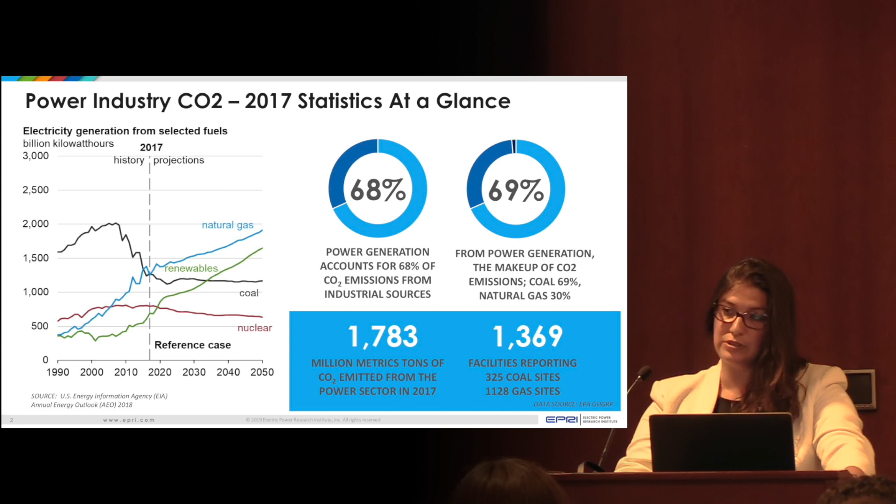In the past 10 years or so, right? So in 2017, about 30% of our power generation came from coal. About 30% or so also came from gas. 20% or so from renewables, actually closer to 18% renewables. Most of that is hydro. The remainder of that, maybe 6% wind, 1.5% solar or so. And then a solid 20% in nuclear power.

So if you look at CO2 emissions that come from the industrial sector alone, 68% of those emissions come from the power industry, right? Which is why we kind of have our whole thing just talking about power generation today. So for all industrial CO2, 68% come from power. Of that 68% that come from power, 69% of that come from coal, and the remainder comes from gas with other things here and there, right?

So if you look at the amount of CO2 emitted in 2017 from coal and gas plants, 1,783 million metric tons of CO2. That's a lot. That's a lot of zeros, right? Which came from about 1,300, 1,400 sites. 325 of those sites, which put out 69% of that, were coal, and about 1,200 or so of those sites were gas sites, right? So you can get a feel for how much more CO2 comes out of a coal asset than out of a gas asset, which is probably not a huge shock to anybody here today, right?

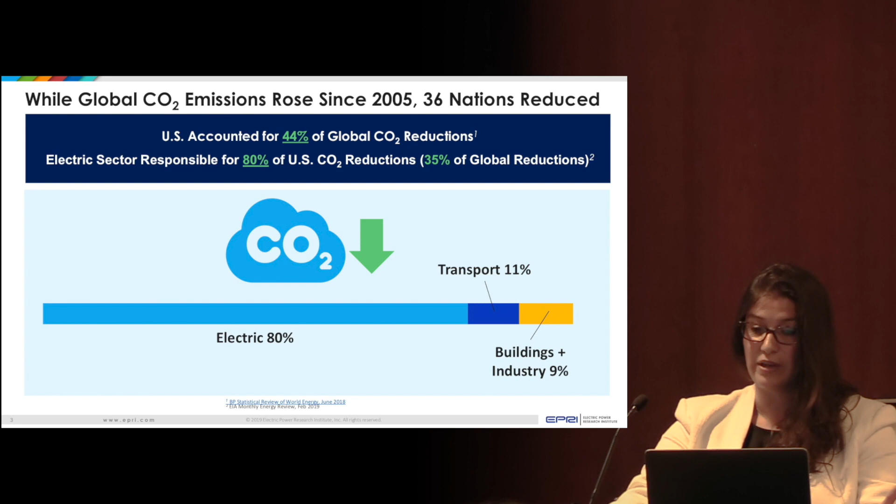So when you look at that, we can't just assume that we're not doing a good job, because actually we're doing quite an amazing job. If you look at CO2 emissions since 2005, although they have gone up, 36 different nations reduced their CO2 emissions, and the U.S. accounts for 44% of those net reductions. And 80% of those net reductions came from the electric power industry, right? So the net reductions that happened in CO2 since 2005, 35% of them were due to the electric power industry, and you can see the breakdown there for the other impacts. So we've had a lot of successes, and we've done a lot of great things.

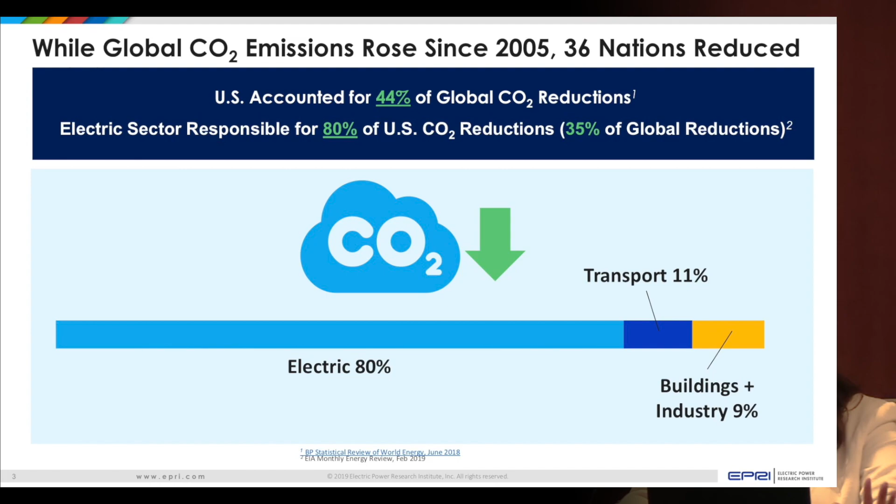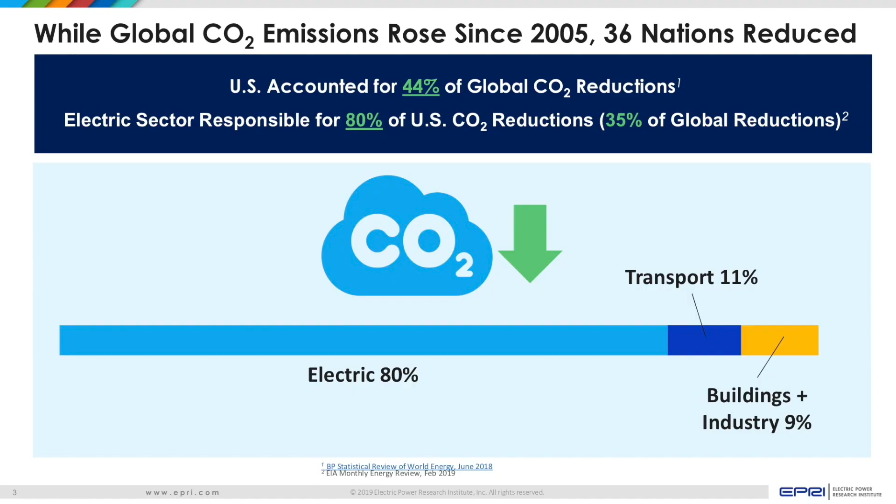Now, what's led to this? A lot of things have led to this. Primarily, those CO2 reductions from 2005 were due to two things. One was efficiencies, and the other was fuel switch. Right? We've had a significant fuel switch since 2005 that's led to that. So let's start with a little recognition. Let's go back 20 years.

Okay, this graph, it's an engineering graph, I'm sorry, but it's not that hard to look at if you think about it. So you have the blue line. The blue line is SO2 emitted in millions of tons. The green bars are CO2 emitted in billions of tons. So it looks like SO2 is bigger there. It's not. I just don't have a scale big enough to put it all in one graph, right? CO2 is significantly larger than SO2 there. But look what SO2 has done over the past 20 years.

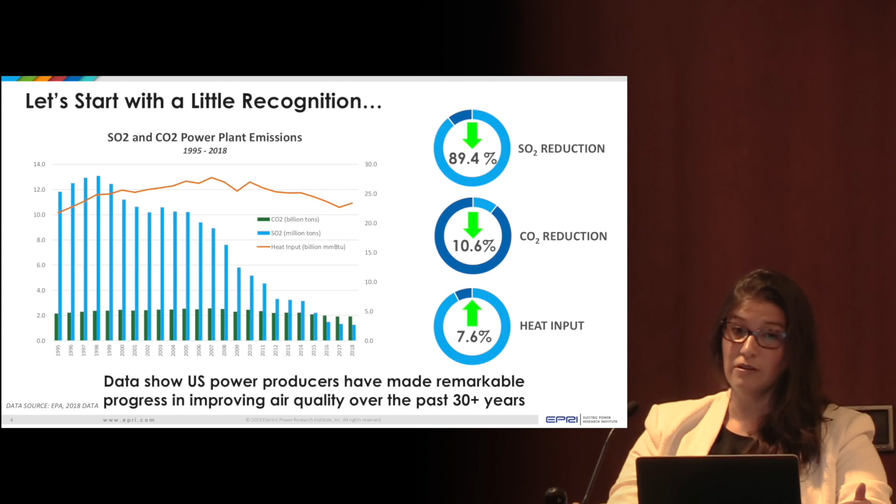What has made that happen? It's not just fuel switching, FYI. It's technology, right? It's the technology that this industry has adopted that has made a remarkable change in some of the emissions that we have put out into the atmosphere, right? So SO2 reductions in the past few years have been 89.4%. CO2 reductions about 10%. Again, most of that is due to fuel switching, and that's with an overall increase of energy output of about 8%. So we can do this again. We can do what we did for SO2 with CO2 by partnering together, by doing the right R&D, and by putting the right engineering practices in place.

So the easy question on that is, well, why don't we just do exactly what we did for SO2? It seems like it worked. Why don't you just go and kind of put those chemicals out together and make them work together. But unfortunately, it's not that easy, right? So why not use the same technology? Look how great it worked for SO2. This is the 3-year mean wet sulfate deposition in the US, the one on the left from 89 to 91, and the one on the right from 2009 to 2011. It's a visible change. You can actually see that.

But there's some significant differences when it comes to SO2 and CO2, and it's a matter of scale. Right, I said on that first slide, one color graph was in millions, the other color graph was in billions. Right, SO2 is 1,400 parts per million in flue gas, and flue gas is exhaust that comes out of power plants.

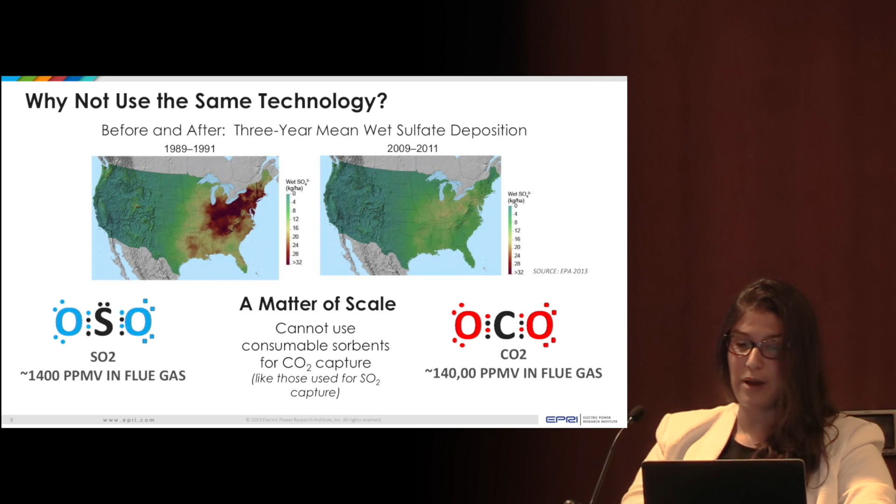We're going to get into that a bit here. CO2 is 140,000 parts per million. Right, so you're at a factor of, and that should have another 0 there, so we can update those before we distribute them. The comma is not in the wrong place, it's missing a 0. So 140,000 parts per million.

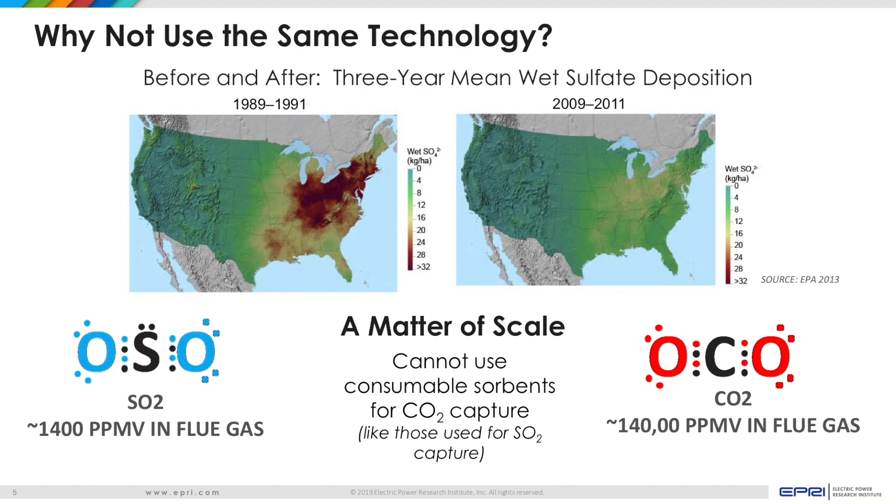So when you look at a matter of scale, the sorbents we've used and the technologies we've used for SO2 in the past don't translate to CO2, because just the amount of surface area you need alone to do it doesn't equate. Right, and that's when we get into some of the challenges with CO2 capture and some of the technologies behind it.

So, carbon capture technologies today. There's basically 3 buckets you could think of when you think of carbon capture technology for power generation today, right? Post-combustion, after you're producing power, pre-combustion, before, and then oxy-fuel combustion, which if you think of it as advanced cycles, a different way to make power. We're gonna get into this in more detail, and it's gonna make a lot of sense, I think.

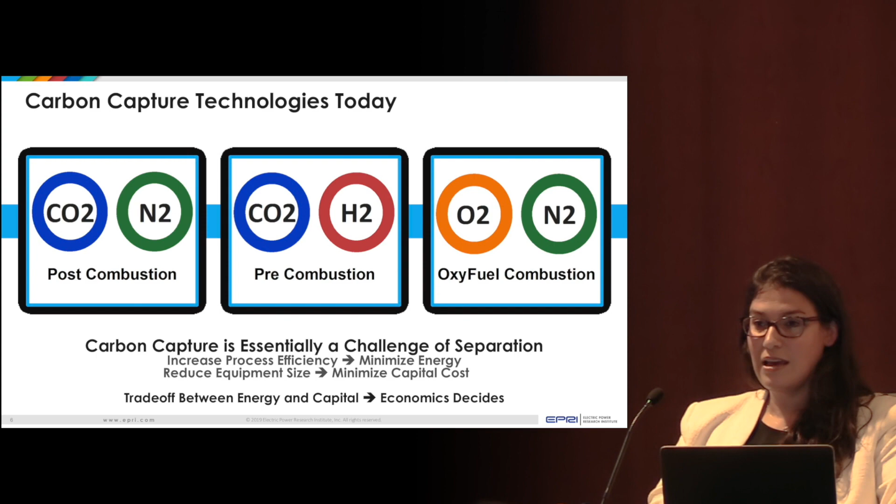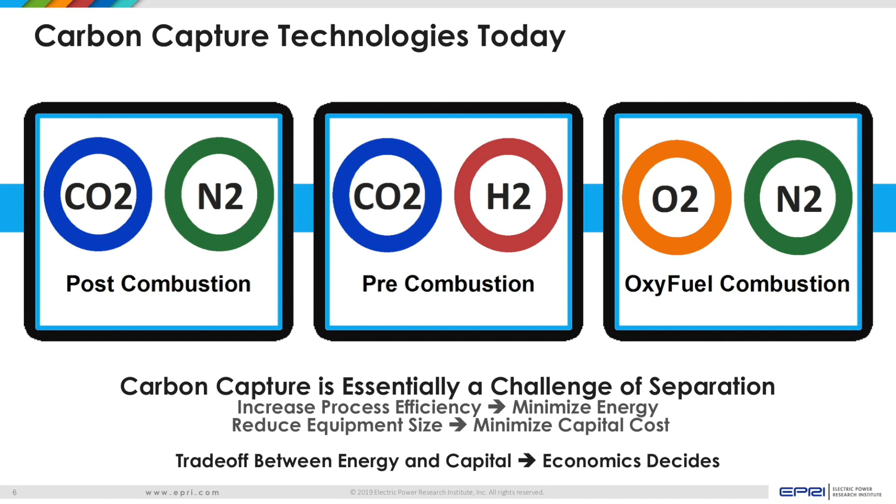So, bottom line though, is carbon capture technology is all about separation. How do you separate carbon from what it's attached to, if you will, right? In post-combustion, you're separating carbon and nitrogen. Pre-combustion, carbon and hydrogen, and oxy-fuel combustion, oxygen and nitrogen, right? And all of this, chemical equations. This all takes a certain amount of energy to do, and it's quite a bit of energy to do it.

So at the end of the day, what's going to make carbon capture technologies successful is minimizing cost, minimizing capital costs primarily, and minimizing energy costs, which come with efficiencies of the processes. So any one technology itself isn't inherently better than the other, right? They all work within the laws of thermodynamics. It's how can we make these processes most efficient, and how can we reduce the equipment size and the engineering of them, and trading off the energy and capital costs to let economics determine what's actually going to win at the end of the day.

So we need to talk about the 4 risks or the 4 realities in terms of what makes CCS something we want to go after, right? And a big part of that is the infrastructure we have on the ground today and the assets we have on the ground today. And by far, for a majority of the assets that are on the ground today, the technology that we focus on is post-combustion technology, right? So I'm going to spend a bit of time talking about what post-combustion technology means, how that impacts both coal and gas assets, before we get into some of the other technologies.

Okay, so let's start by talking about a power plant. How many people in here have actually spent time in a power plant? Any? Great, that's fantastic. Okay, good.

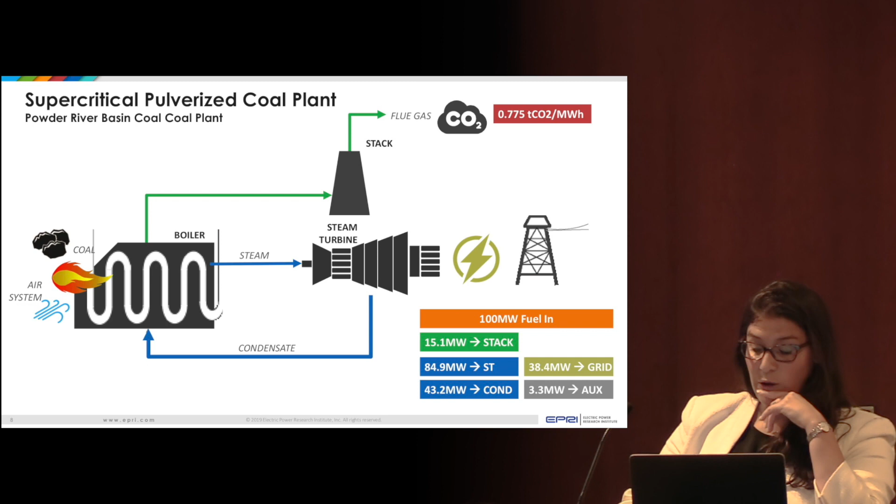So, supercritical pulverized coal plant burns PRB. These are very simplified, very generalized prints here, right? So, how does this actually work? We have coal, we have air, we have fire, we combust it. That's all pretty straightforward. Let's say we put in 100 megawatts or so of fuel for the sake of the conversation, right? What comes out of that? We boil water, we get steam, it goes forward to a steam turbine, and we get about 38 megawatts on average out of a steam turbine putting 100 megawatts in, about a 38% efficiency plant, right?

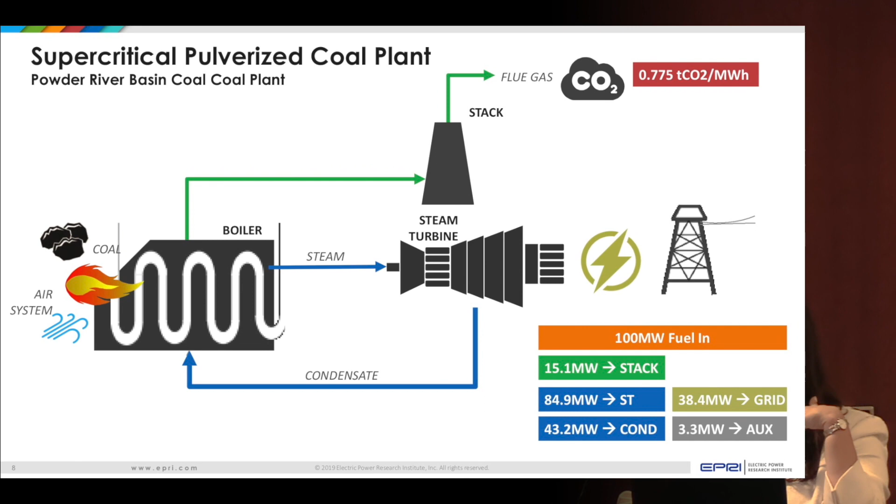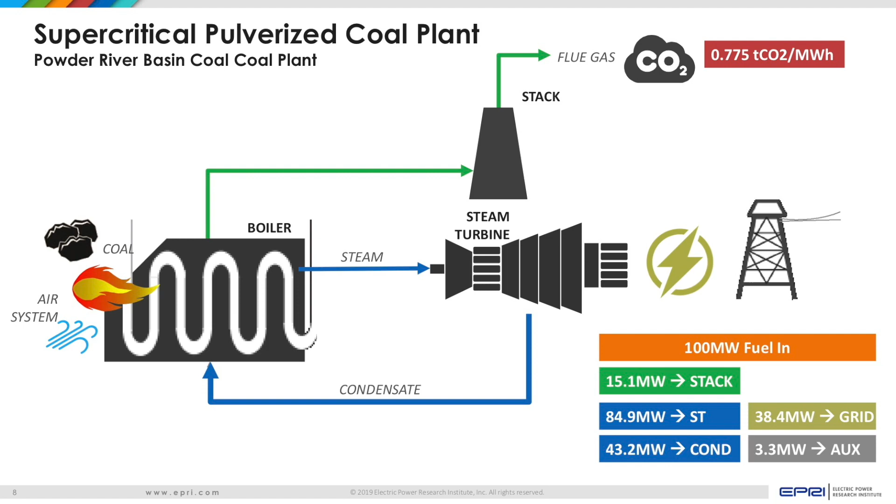You spend about 3 megawatts running the other equipment in the plant, right? I put like 3 components on there. There are thousands of components in a power plant. So 3 of those megawatts, 3%, goes back to power all the things you need to generate that 38 megawatts. And then you have a bunch of exhaust that goes out, and that's where you get CO2 emissions. You get a lot more than CO2. You get oxygen, you get nitrogen, you get some argon, you get lots of stuff, right? But the CO2 emission for a typical coal power plant is about 0.775 tons of CO2 per megawatt hour.

And then you have some other energy losses. You have condensate that goes back, and you have some recirc. But that's kind of the basic operation of a power plant. It's pretty simple, right? And that's a coal plant. It gets slightly more complicated when you look at a natural gas combined cycle plant, but it's relatively the same, right? So you have the same cycle here. If you think of the coal plant cycle you had over here, the steam cycle over here, you're just adding a gas cycle on the bottom.

So on the bottom left-hand part there, you see a gas turbine. You have natural gas, air, and some ignition that sends power out of your gas turbine. Let's assume we put 100 megawatts of fuel into a combustion turbine. Right away, you get out 35 megawatts to the grid from your combustion turbine.

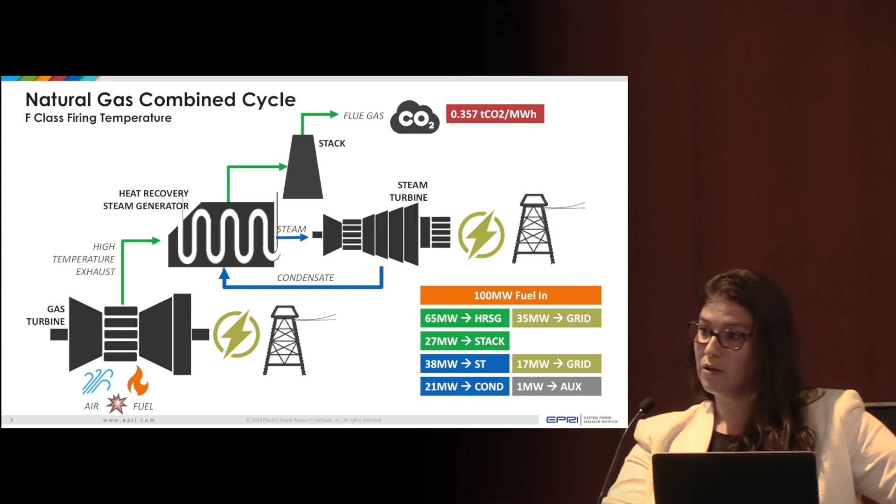Then you take that exhaust gas that comes out of the combustion turbine, and you use that to heat water, just like you did in the boiler in the steam cycle. So now you're heating water, which sends steam forward to a steam turbine, and you're getting an additional 17 megawatts out of that. So now you have about a 51 percent efficiency for the same amount of fuel input because of the combined cycle aspects of this plant.

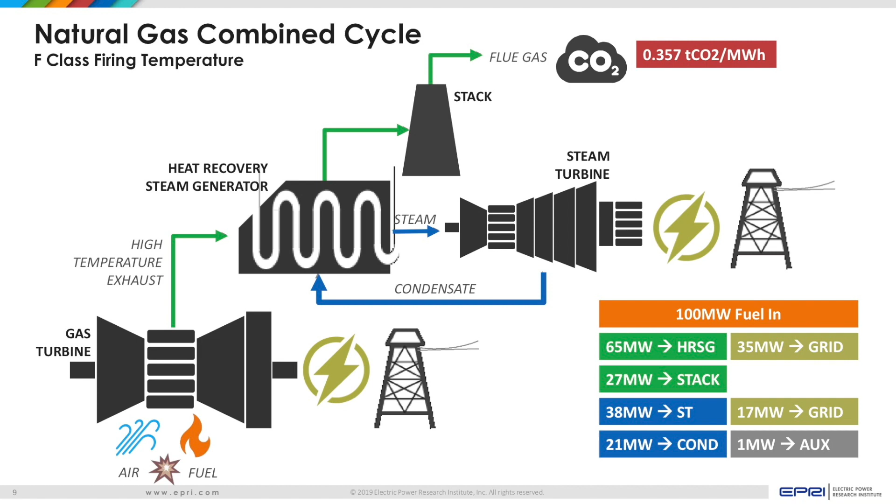The other process is still generally the same. You have exhaust coming out of your heat recovery steam generator, putting out some CO2 as well as other things in your flue gas. You'll see that the CO2 concentration here is much less for gas than for a coal plant. And the same thing, you have recirculation of condensate and whatnot. You can kind of see the pluses and minuses, what came in and what went out, on the right-hand side there for you guys. So pretty simple flows that end up happening for a natural gas plant, just like a coal plant.

You'll also see a difference in the natural gas unit here, this 1 megawatt of auxiliary power. We talked about the amount of power it takes in a coal plant to run the plant itself. It's about a third of that for a natural gas plant. There's less equipment, it's just a bit more simple. You don't have pulverizers, you don't have as many feed pumps, you don't have as many things as you do in a coal plant, not quite as much equipment to keep it running and operating.

Okay, so these are the plants as they stand today, before we've added any kind of carbon capture technology onto them, and we'll get into that in a second. When you talk about post-combustion carbon capture, there are really four key technologies used. I'm not going to get into the details of these technologies, this is as far as we're going to get into them, but they're good to know. We have absorption, adsorption, membranes, and cryogenics.

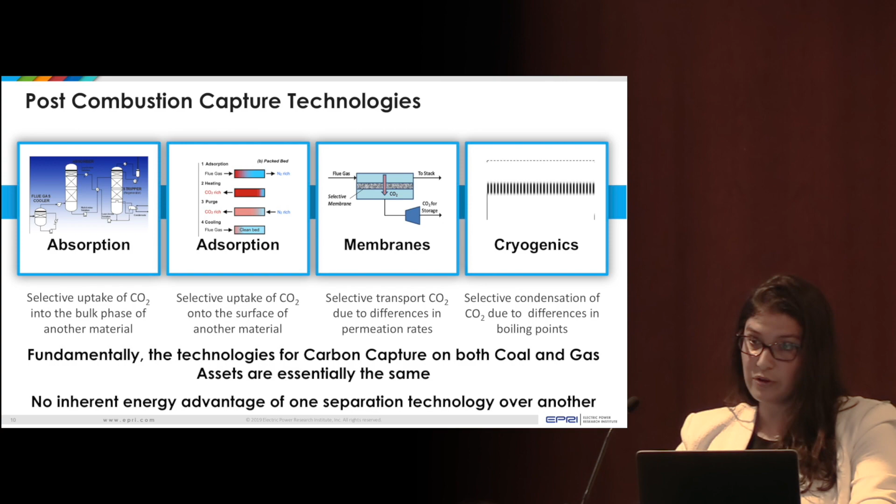Post-combustion is mostly what's on the ground today, and absorption is mostly what's on the ground today for post-combustion capture, the one all the way on that side, using solvents and amines and things like that. Fundamentally, the technologies used for post-combustion capture are the same for coal and gas. They're asset agnostic, they don't care whose flue gas they're cleaning, they're going to clean it. That's really important as we look at the investments and the R&D we're making in this area, to understand what's different and what's the same, and how we can leverage those engineering decisions as we make those investments. So again, there's no inherent energy advantage of one of these things versus another, because it really comes down to, can you separate them efficiently with low capital cost?

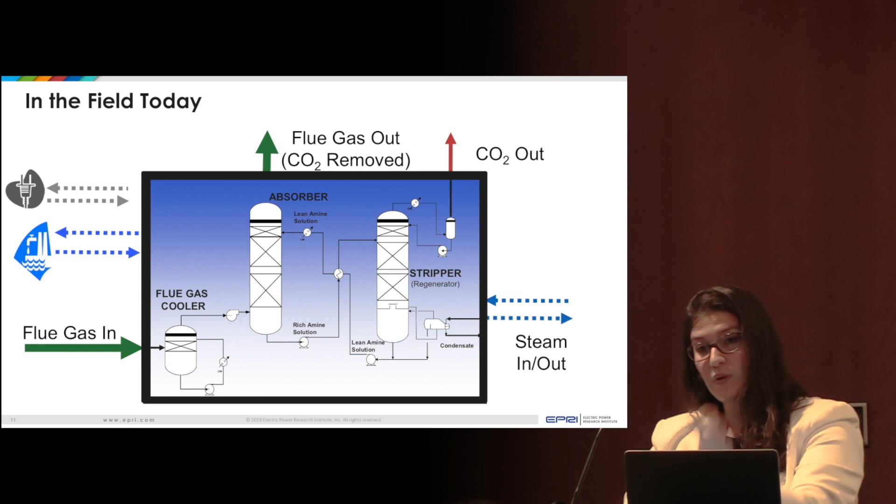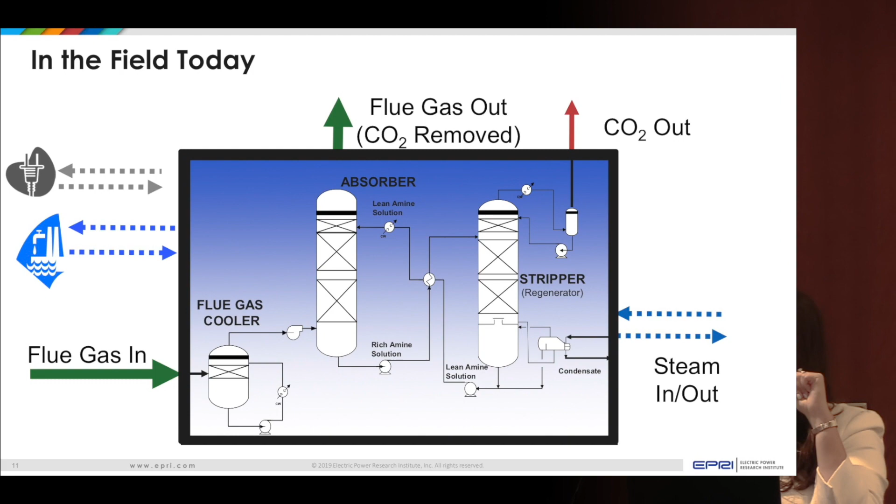Okay, so where do they go on a power plant? Because that's where the capital cost comes in. In the field today, you have flue gas that comes in, it goes to some kind of CO2 technology, showing an absorbent technology. You have flue gas out where the CO2 is removed, and then you have CO2 going out in a different place. What's important to look at here, and what's not shown, I'm going to show you in a second, are all the other things that have to interact with this system that add additional cost, and we need to get that cost reduced. You have to have steam in and out, you have some heating capability, you need to have power in and out. So that auxiliary power I talked about with the power plants, where the coal plant was 38% efficient and the gas plant was 52% efficient, you need to steal some of that power and send it here.

And water. You need water for cooling capability, right? So all resources that impact efficiency and add cost to these plants, we really need to better understand and optimize. So now let's take this and put it on a plant.

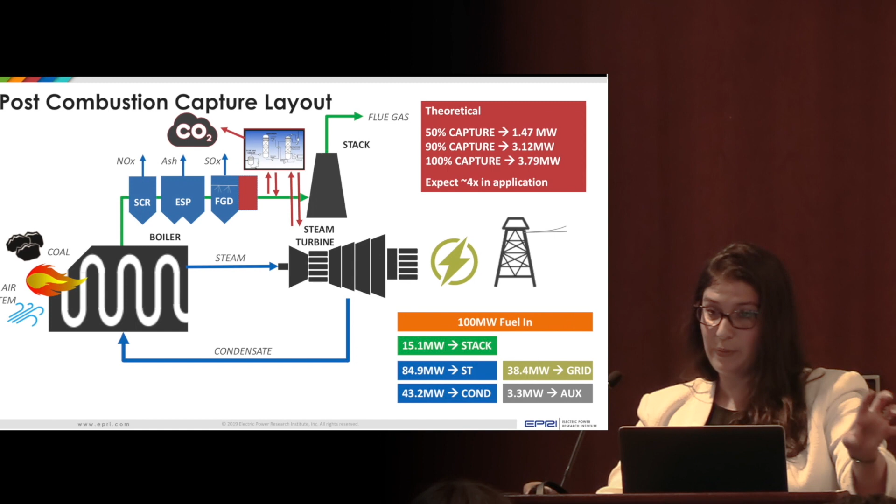So post-combustion capture gets added after all that—that's where it goes, right there. Now when you do that, you need to make some changes to your FGD, which takes some cost. You also have to pull steam from your steam turbine up into your post-combustion capture system, which means you have to make investments on that steam turbine, and you're taking some efficiency away from it.

So when you look at the theoretical idea of how much energy it will take to do this, how much energy you need to steal from this plant—just like that aux power—theoretically, based on the amount of capture you have: 50% carbon capture is about 1.47 megawatts, 100% carbon capture is about 3.79 megawatts. You'll see it's non-exponential growth, so the more capture you take, it doesn't cost tons and tons more.

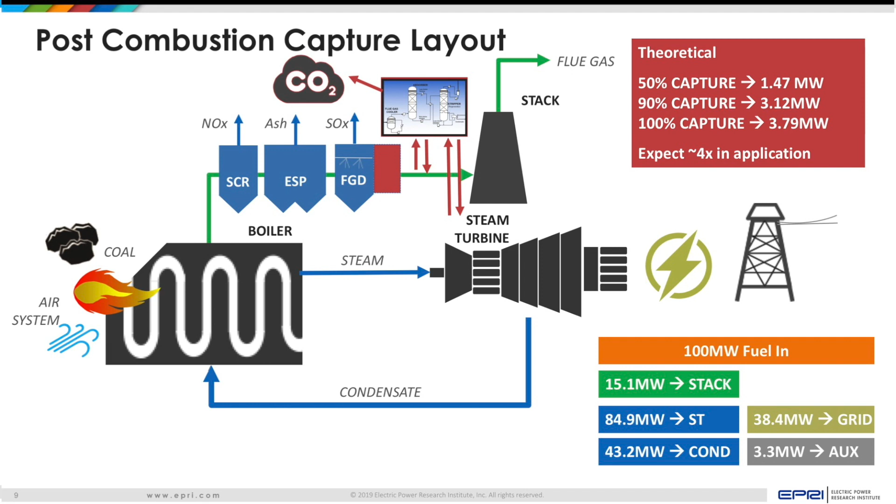I had a picture of me standing next to a steam turbine, but I deleted it—I can email it to you guys if you want to see it. So that's the area you actually tie into the steam turbine. What I don't capture here is water—you're using more water, tying into your steam turbine and taking some losses there, and also adding more auxiliary power for this technology.

That being said, you're leveraging an asset that's already on the ground today. You don't need the capital cost of rebuilding that asset, and there's lots of value in doing it. So I'm not going to draw this for a gas plant.

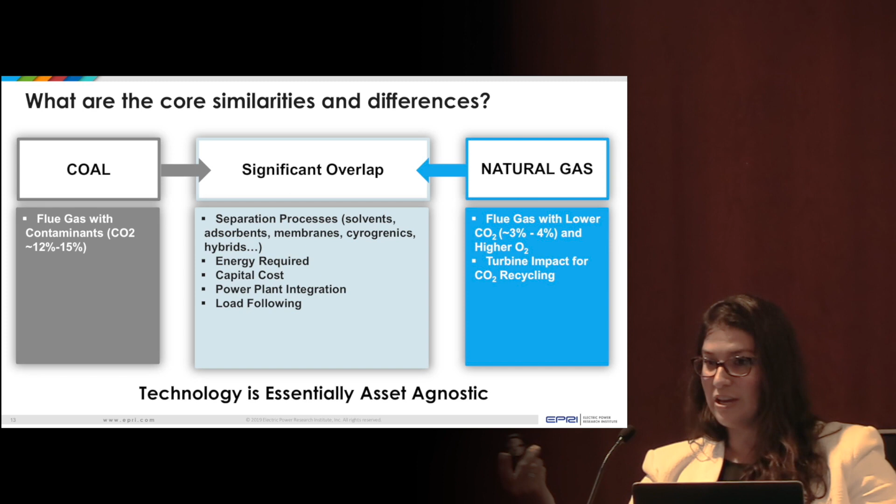What are the core similarities and differences between a coal unit and a gas unit? Why do we care, and what do we look at for R&D? For a coal unit, your flue gas has contaminants, and CO2 is about 12 to 15%, roughly 14% of the flue gas. The natural gas unit has much lower CO2 content—that sounds like a good thing, except it actually makes it harder to pull the CO2 out, because there's less of it in there, so it's harder to find.

It actually takes significantly more energy the lower the concentration of CO2 in your flue gas. That's why, when we talk about some of the technologies in a little while, the question is how can we separate the CO2 so it's in higher concentrations, allowing us to strip it out. For natural gas units, there's also other approaches, like potentially using some of that CO2 cycling back into the gas turbine to try to increase that concentration.

So that's kind of a unique aspect of natural gas that we could potentially be looking into. But really what it comes down to at the end of the day is there is significant overlap between adding this technology to coal or gas, which is great news because all the work we're doing goes twice as far.

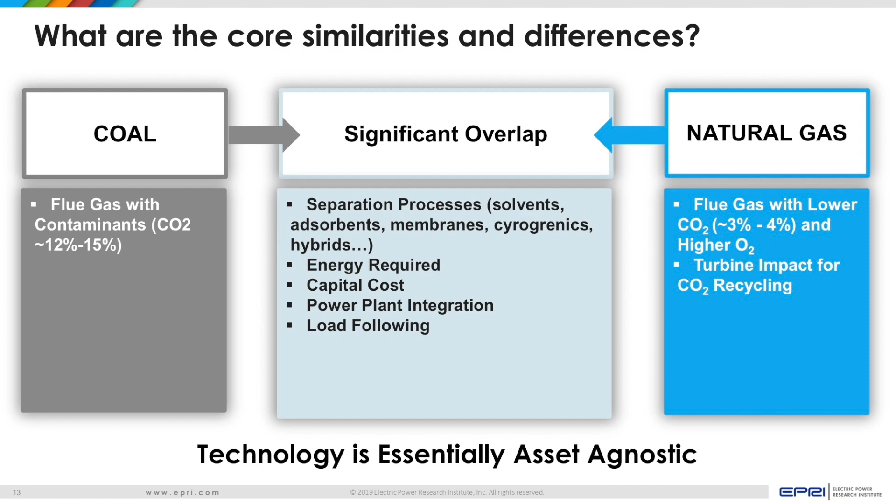Separation processes are the same, right? We talked about the four technologies, they're the same for coal or gas. The amount of energy required, the amount of capital costs required, the power plant integration, that can't be ignored because it's rather complex. So you're going to change the way you operate these units.

Power plants today, the importance of them being flexible, having the ability to load follow, not only just follow load, but shift up and down relatively quickly to respond to changes on the grid based on what's on the grid today and a lot of our intermittent power sources. That's a challenge. It's even a challenge today with our existing environmental control equipment, which many times limits that flexibility. So all of the R&D and all of the work around those things to make this a reality is fully translatable to both types of assets.

Okay, so technology is essentially asset agnostic.

So post-combustion capture on power plants today. We see two things out here today. I'm not going to go into this because I believe you guys are going to hear about this in one of your future briefings. But what I really want to point out here is the size of the capture technologies.

So let's take a look at this one over here, the Boundary Dam facility. Boundary Dam facility is up in Canada, it's run by SaskPower. You'll see here in the slides it says 139 megawatts electric net out of 730 megawatt coal.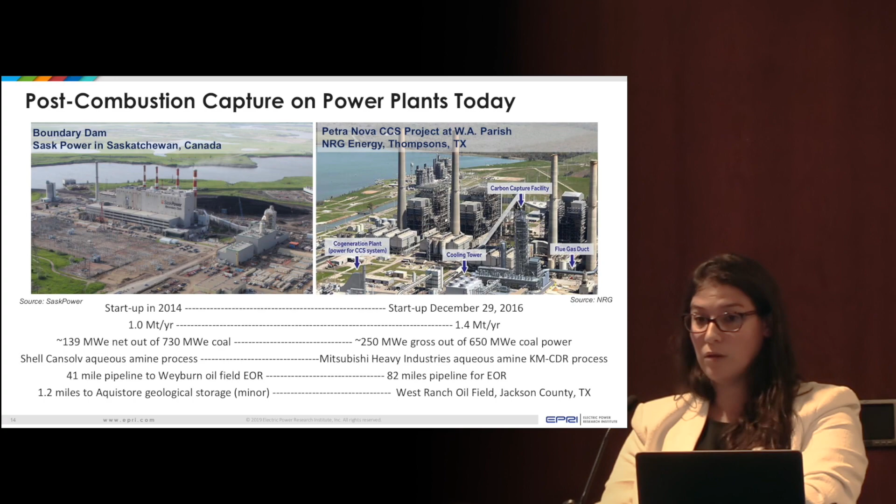So that's telling you that the capture technology, for I think there's four coal units at that site, one of those coal units is 730 megawatts, and we're capturing 139 megawatts of CO2 emitted, if you will. So we're capturing from basically less than half of one of those coal units. When I talk about capital cost, this is the capture facility. So that's a lot, there's a lot of build, a lot of capital costs to capture less than half of the CO2 emitted from one of those coal units.

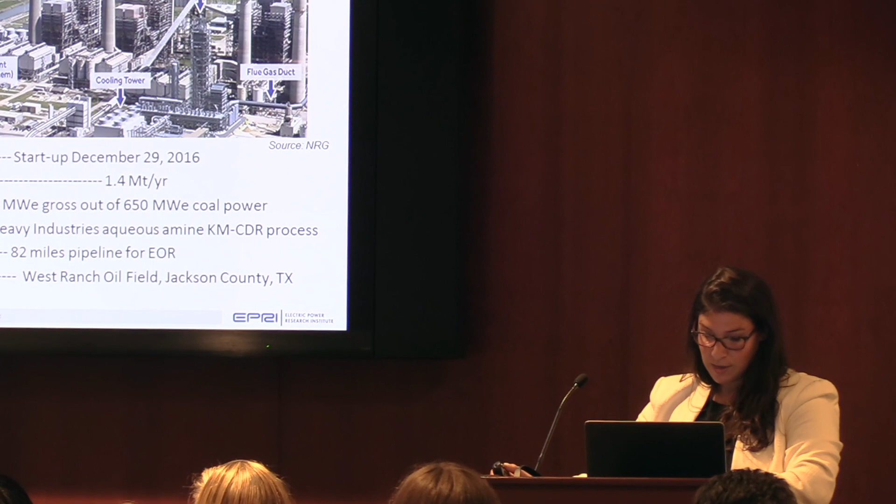This is why we need to do R&D, right? This is why we need to better understand the technology, because doing that allows us to get those capital costs down. And again, I said it's between energy and capital costs. How do you reduce both of those things? I'm not going to go through all the other pieces on that slide, but I'm sure Shannon said, well, you'll talk about it in a future briefing, and I'm happy to chat about it with you guys at some later day.

So, carbon capture technologies today, going back to the slide we started with. We said we had post-combustion, we just kind of discussed that, pre-combustion and oxy-fuel. Let's get into these next two technologies kind of together, because they're kind of complicated and they're advanced cycles. We're not going to go too far in the weeds on them, but we'll start with pre-combustion.

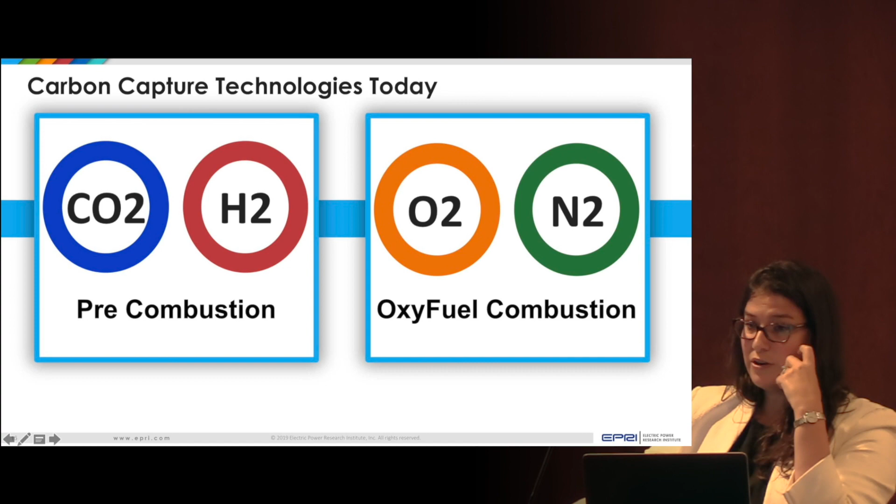And we see this in IGCC facilities. There's IGCC facilities out there today, there's one in the U.S. currently operating, there was another in the U.S. that was capturing carbon that's not running right now. But when you look at an IGCC plant, the difference is you are doing separation before you combust anything. So we are trying to separate CO2 and hydrogen on IGCC units.

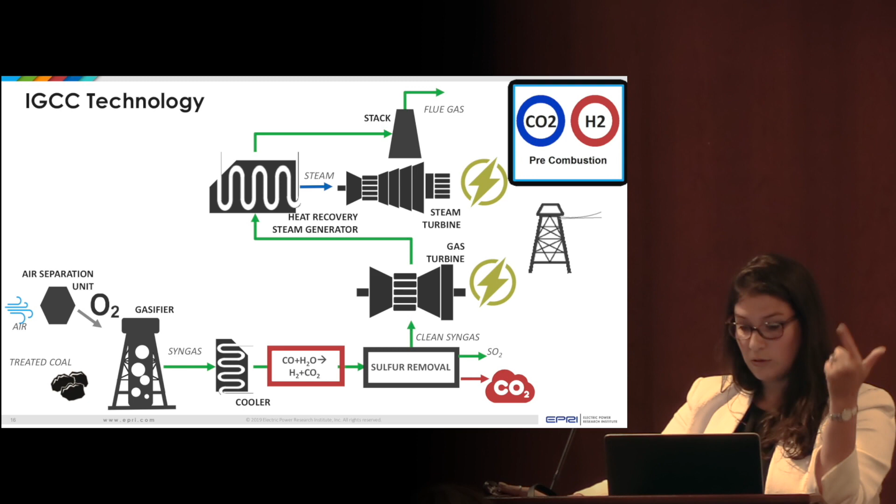And we do that with an air separation unit and a gasifier. So just like I showed the other assets earlier, you start with air, you start with some kind of fuel, in this case coal. Before you put those two things together into any kind of power to combust it, you're going to take the air and separate oxygen from it. And that oxygen is going to go with your coal, and your coal is actually treated before it goes into this gasifier, which will give you a syngas.

A syngas, in this case, has a lot of sulfur in it, so it has to go through some technologies, a cooler, and that sulfur gets removed, it takes the SO2 out, and then you have a clean syngas that goes to your gas turbine. That whole cycle is really no different than the cycle we talked about earlier, but the difference is the CO2 is in a much higher concentration, and therefore it's easier to get out of the air, because if there's more of it, you can find it more easily, it takes less energy to pull it out from where it is. So that's kind of the fundamental pieces around IGCC.

There could be some high capital costs there, and there's a lot of complexities with it, right? It's a big chemical. A lot of people think of some of these technologies as large chemical plants, right? If you come out of the power industry, for sure, even the investments that we've made in terms of SOx and NOx and ash and whatnot, people look at that as large kind of chemical plants that are in the back end of their power plants. And that's going to continue, right? Because these are the technologies we use to pull these things out of the air, out of the flue gas.

So that's a little bit about IGCC. Let's move on. Oh, actually, you know what? I didn't tell you about the carbon capture piece of it. So that's the IGCC plant on its own. Okay. Now, when you add carbon capture into it, you actually add another reaction. So there's some more modules in here where you have another reaction, and you pull the CO2 out super early. Right, so it's higher concentration CO2, and you pull it out where you pull out the sulfur, so you can take that and do other things with it, whether you want to sequester it, utilize it, enhanced oil recovery, whatever it needs. All right, let's move on now to oxy-fuel combustion.

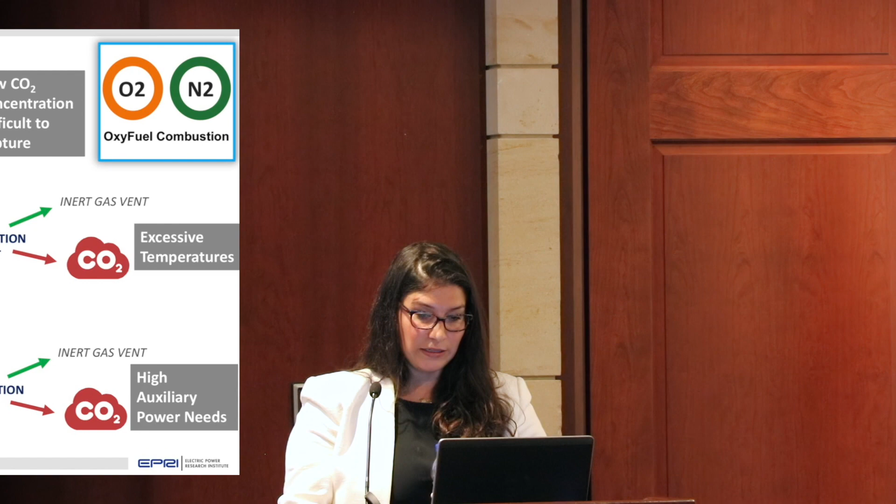All right, so this little picture is the same picture we used before with a typical coal plant, okay? And let's just slowly step through the differences between this plant, an existing coal unit, and what oxy-fuel combustion really does. Simplified. Okay, so what we've talked about so far, we have air, we have coal, we ignite it, we get some steam, that creates power, we get some flue gas, and that puts out some CO2 and other things. 12 to 15% volume of CO2 comes out of that flue gas.

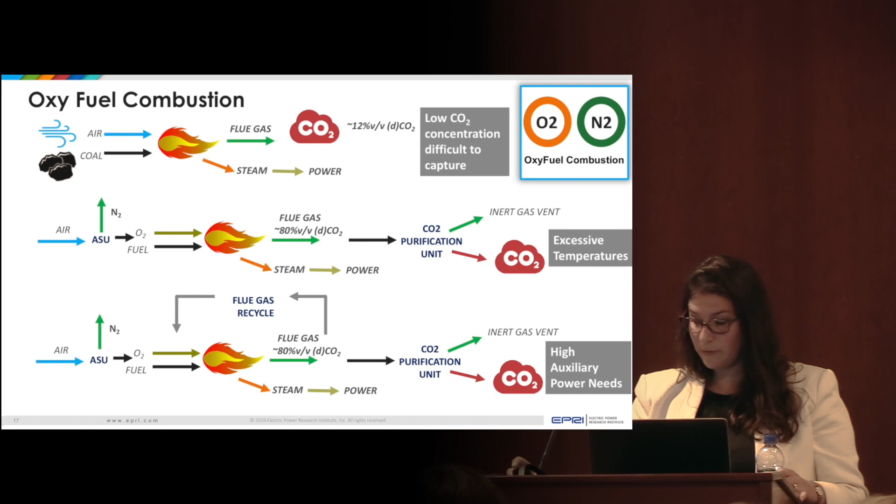Okay, so with oxy-fuel combustion, you are trying to separate oxygen and nitrogen. Again, all in an attempt to get a higher CO2 concentration. So how do we do that? Okay, we do that by separating air. So with oxy-fuel combustion, you add an air separation unit on the front end of this, and you separate nitrogen and oxygen. Right? This is actually pretty expensive to do. It takes a lot of energy to do.

Okay, oxygen and fuel is then mixed. And it's a pretty typical power plant from there. You have oxygen and fuel that's mixed. Again, steam goes off and sends power. Your flue gas now has closer to 80% volume CO2, much, much easier to catch. You have a CO2 purification unit, and you can pull the CO2 out that way. Okay? The problem with that is it runs really, really hot, right? So because of that, there's been another step which adds some capital cost here in terms of recycling that flue gas to minimize those temperatures, right?

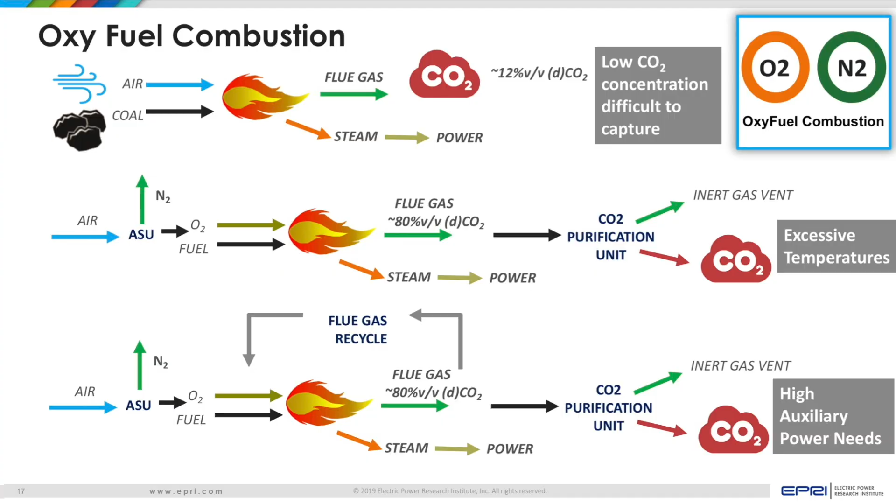So the basis of oxy-fuel combustion is really utilizing cleaner air, if you will, just oxygen for that combustion, so you get higher concentrations of CO2 and you can pull out that CO2 easier, right? Because we said the higher the concentration of CO2, the easier it is to pull out, the lower capital cost, the less energy it takes.

Okay? Now there's been a lot of excitement and a lot of conversation recently about the Allam cycle. How many people are familiar with this cycle? A couple people. So what's really exciting about this cycle is it uses supercritical CO2 as the working fluid, right? So we've been talking about using steam as working fluid, we've been talking about using gas as working fluid, right? This cycle has kind of wiped away everything we've done in the past and looked at how can we most simplify the capital costs in here, reduce the amount of equipment, and use the CO2 to create energy, right?

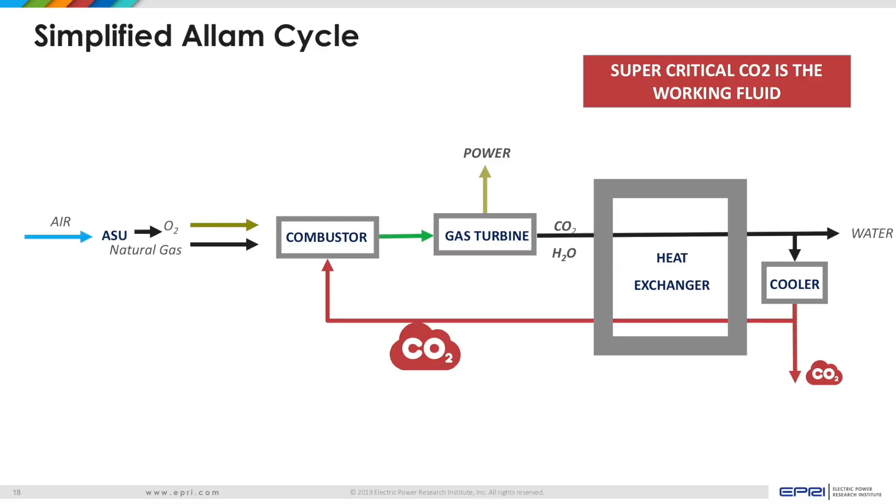So a lot of really exciting things around the Allam cycle. This is something that could potentially be a game changer. There's a lot of people making investment in it, and it's something that we're watching closely at EPRI, and I'm sure you guys are too, to see how this plays out over the next couple of years or so.

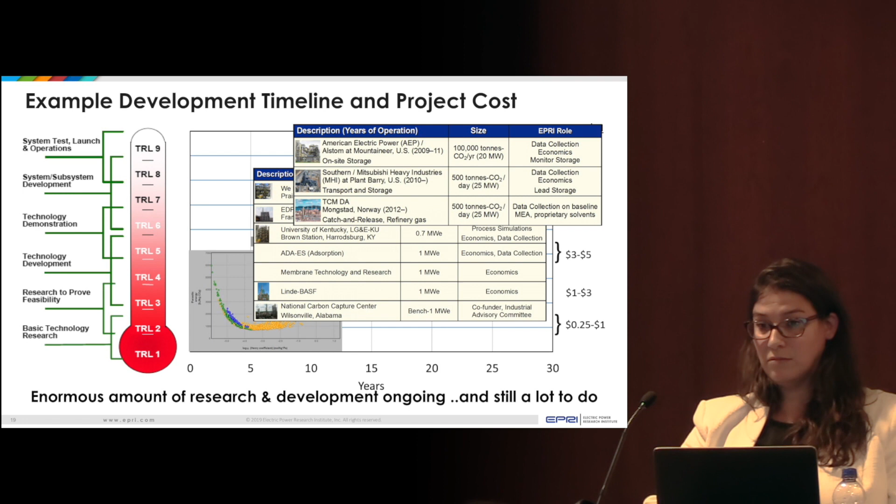Okay. So when you look at investments made, and this is a lot of what we do at EPRI, right? We're a research and development organization, and you look at the different TRL levels that are out there. It takes quite some time to get from basic research, just an idea, to full commercial scale. These technologies are out there at full commercial scale today, right? They need to be improved for sure, and there's a lot of new technologies and new advancements being made, right? But the sooner we start, the better off we are. We are already very far down that path, right?

We have lots of examples of basic research where we do modeling and try to understand all the different types of technologies and amines and chemical developments within a given capture technology that can be put on plants today. We have a huge amount of smaller pilot projects around the world looking at different capture technologies. And then we have quite a large amount of larger scale demonstrations around the world where we continue to make strides in capture and try to get as many of these things in development as we can.

And in addition to what was talked about earlier, what we're seeing in the power industry is that our members specifically are a lot more interested in this technology over the past couple of years than they were a while ago, right? Over the past couple of weeks, matter of fact, we've gotten a lot of calls from members really excited and looking to make some investment in these areas and figuring out how they can be a leader in capture technology. So a really exciting time for us at EPRI, in the industry, and for the country to see how this helps lead us to our CO2 future.

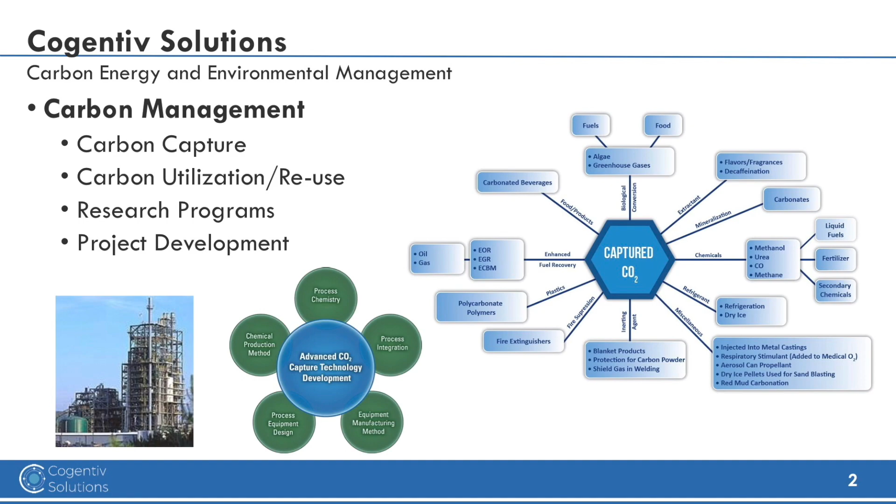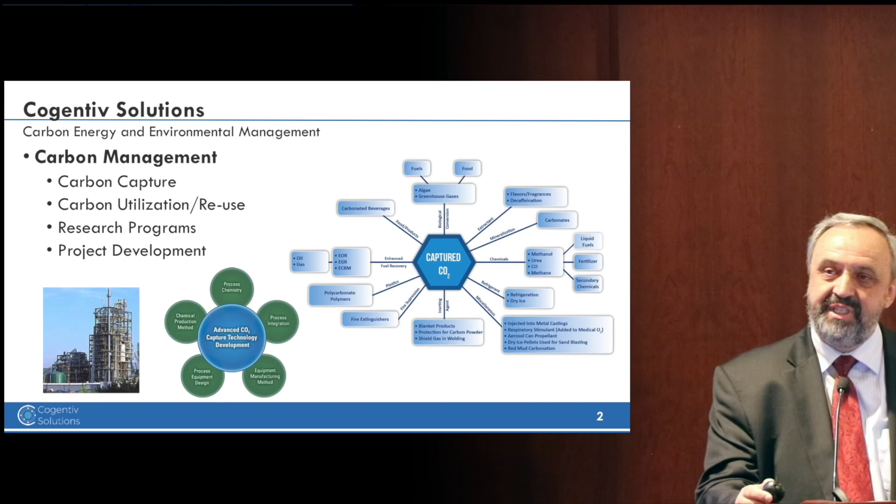Lee mentioned that Cogentiv Solutions consults in a lot of different areas around carbon management. Carbon capture, of course, but also carbon utilization and reuse. And I help DOE with their research programs and with project development efforts as well. So there's going to be some overlap in my presentation and in Neva's, but hopefully that just helps to reinforce some of the concepts that we're trying to get across here today.

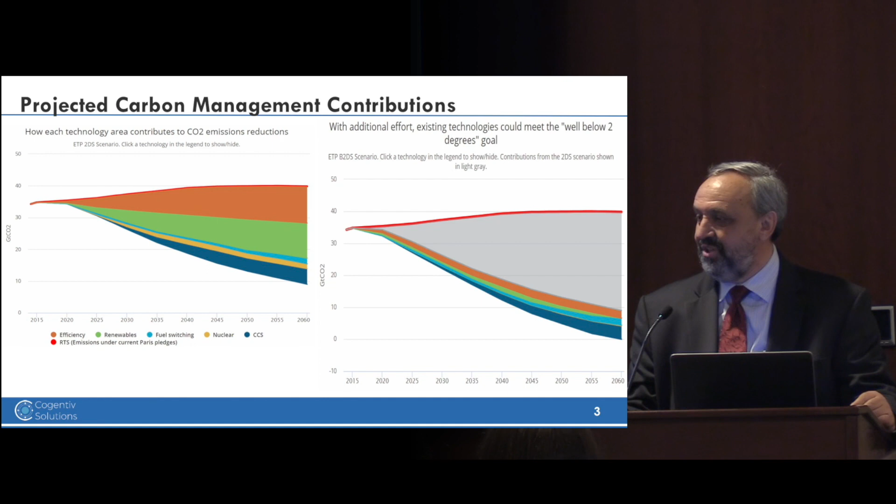If you look at the International Energy Agency's projections as far as what's going to be necessary to meet different greenhouse gas emission reduction targets, Neva mentioned before that for the 2 degree C scenario about 15% of the emission reductions associated with that scenario are going to need to come from CCS.

And of that emission reduction associated with CCS, it's split among the power sector and the industrial sector. Globally, power accounts for about 40% of total emissions. The industrial sector accounts for about 20 to 25% of emissions. In terms of the amount of CO2 emission reduction that will come from CCS, it's split fairly evenly. A little bit more is projected to come from power production, so just under 50% is projected to come from industrial sources in the 2 degree C scenario.

The other interesting part is that if you look at the more stringent scenario they've evaluated, the well below 2 degree scenario, a lot of the additional emission reductions are going to need to come from CCS. And if you look out at the 2060 time frame, about half of the emission reductions in that time frame are going to be associated with CCS. So it's clearly something that we need to think about.

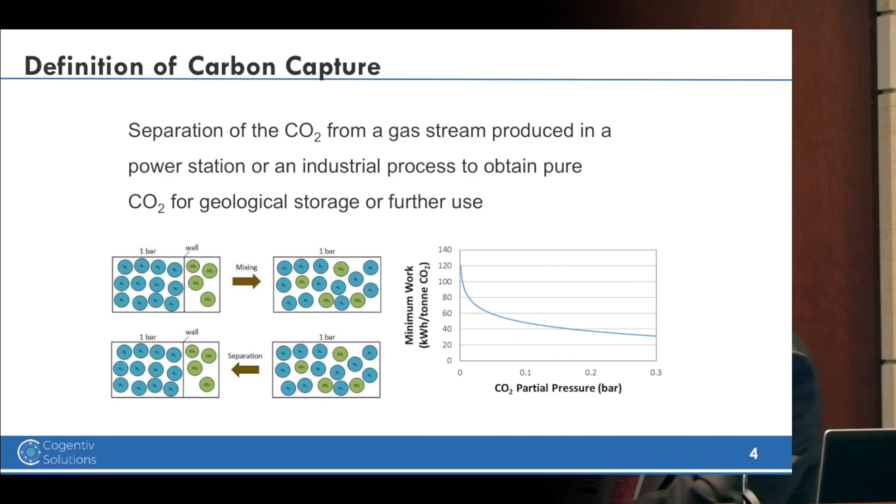Now, Neva started this discussion talking about the importance of concentration of the CO2 in a gas stream, and the importance that has in terms of being able to remove that CO2 from the gas stream. That doesn't work very well. Okay. I put together a little explanation of how that works.

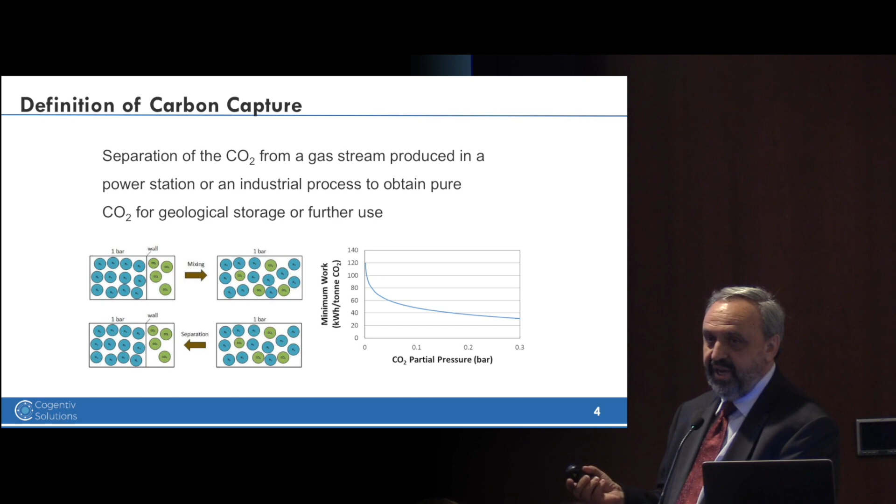If you think about gases in a box, in this top left box, say you have nitrogen represented by the blue dots and CO2 represented by the green dots, and in the box you have a divider keeping them separate. If you remove that divider, the gases are going to spontaneously mix together, and that produces entropy, it produces disorder, and so you lose some energy associated with that.

The gas separation process is reversing that. It's taking that mixed gas and separating it back into its components, and it takes energy to do that. That's a really important part of CO2 separation. This plot on your right shows how that energy is required as you get to lower and lower concentrations of CO2. And the interesting part is that as you get to the lowest concentrations, the energy required goes up really quickly.

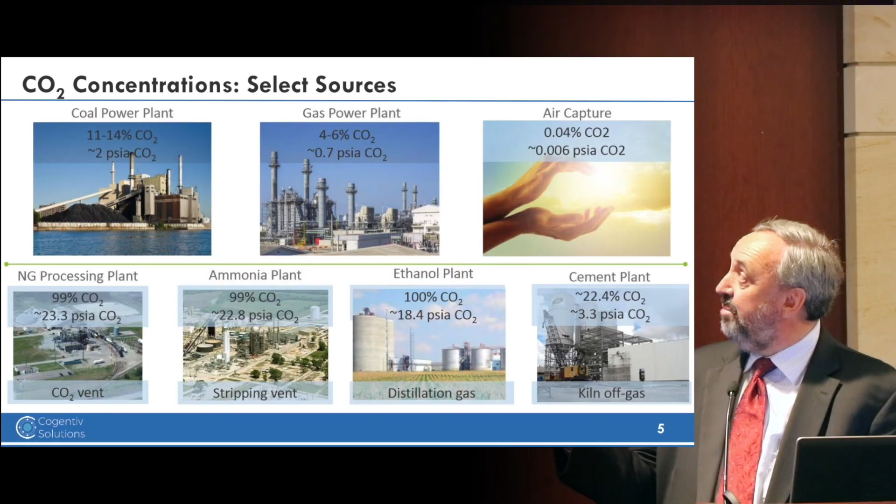And that impacts the cost associated with CO2 separation. So, it's important because there are a lot of different sources out there, and the concentrations associated with those different sources vary considerably. And so in the air, we're talking about 400 ppm, about 0.04%. Really low concentration in the air. It's going to take a lot of energy to separate the CO2 out of the air.

In gas-fired power production and coal-fired power production, the concentrations are about 4% in gas-fired power production, 11 to 14% in coal-fired power production, still relatively low. Sectors like cement and steel have slightly higher concentrations. Cement on the order of 22%, steel's a little bit more than that, but in the same ballpark.

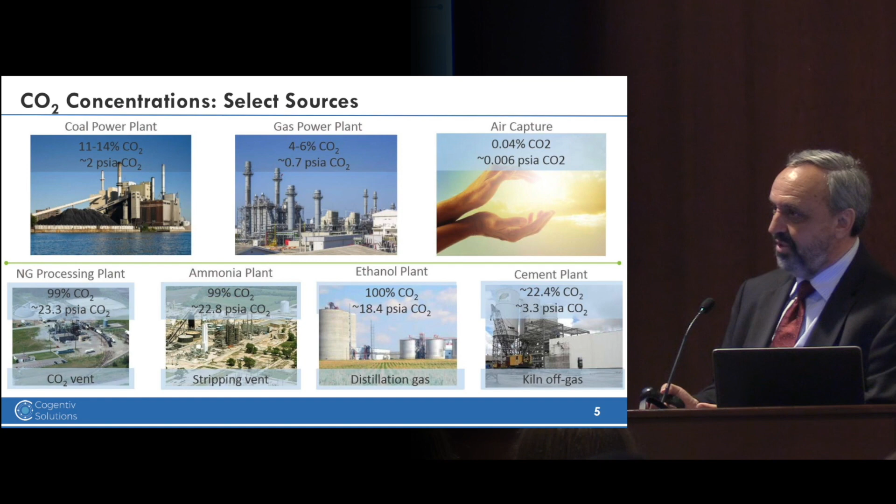So slightly higher concentrations. Then you start looking at some of the other industrial sectors out there producing different products, like ethanol or ammonia or natural gas processing. What you see there is really high concentration gas streams. And so, again, going back to this principle of the cost increasing as the concentration decreases, for these sectors with the high CO2 concentrations, the costs are going to be lower.

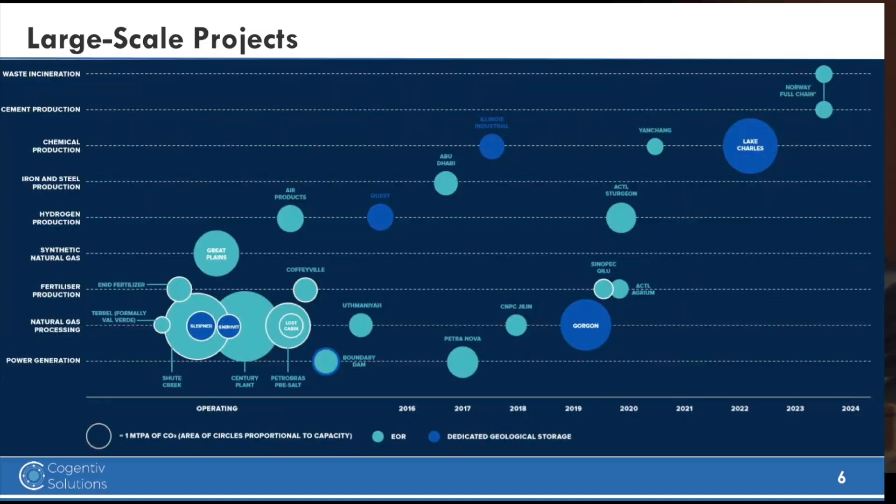So if we think about how that has played out in the real world so far, this is a diagram from the Global CCS Institute's status report. It shows kind of the history and the future of large-scale carbon capture facilities globally. And there are a couple of interesting things to note here. The dotted lines moving across the plot represent the different sectors where these facilities are operating.

And the thing that jumps out most there is that there are a lot of them associated with natural gas processing. The light blue dots represent facilities that use their CO2 for enhanced oil recovery. The dark blue dots represent saline storage. Okay? But a lot of facilities associated with natural gas processing, a few others with some of the other process industries as well.

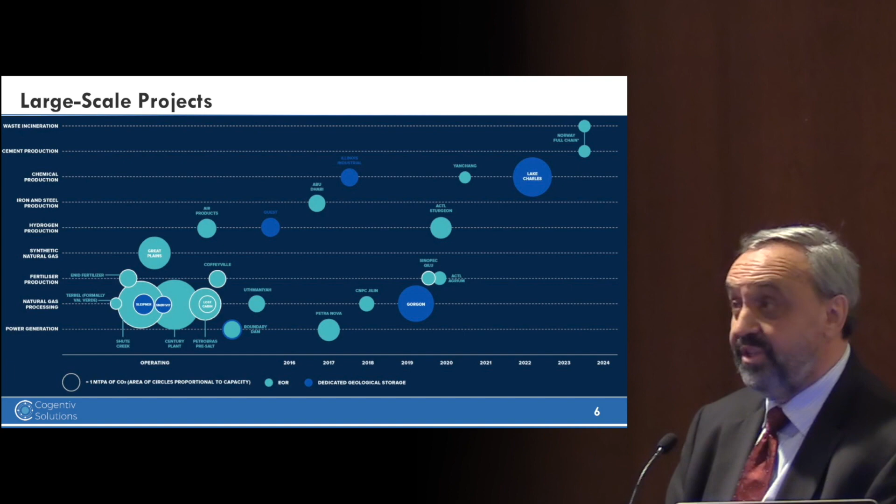The power sector facilities that are in operation, that Nico pointed out earlier, are the Petra Nova facility and the Boundary Dam facility up in Canada. Those are much lower concentration, and so they're going to be more expensive to capture the CO2.

These top two are kind of interesting. They represent sectors that have not been active in carbon capture before, but one of them is cement, and the other is waste incineration. Those are both in Norway, and they're both undergoing FEED studies at the moment and are expected to move forward soon. But again, those sectors represent low concentration sources.

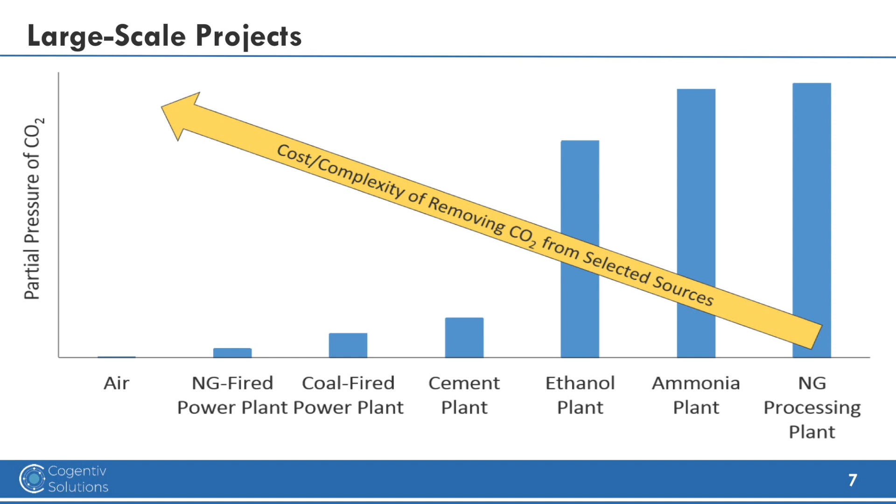So, what we've been taught by what has actually happened so far is that the sources that have high concentrations are the ones that dominate the operating facilities that are out there right now. And so things like ethanol production, ammonia production, natural gas processing, high concentrations, lower cost of capture. The lower concentration sources have far fewer facilities because their costs are significantly higher. And the facilities that have gone forward in those sectors have required a substantial amount of public support.

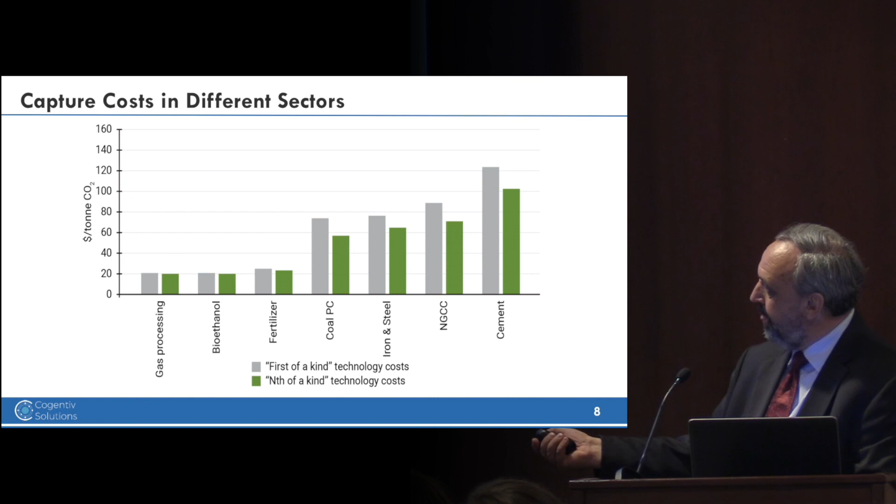So what does that mean in terms of actual costs? A report was put together about a year and a half ago that looks at the costs associated with these different sectors. And again, these high concentration sectors have relatively low capture costs on the order of $20 per ton. In this graphic, I'm showing both the first-of-a-kind cost and the nth-of-a-kind costs, and that's a significant factor as well.

Anytime you do something for the first time, it's harder. You make a lot of mistakes in the planning process. You build in lots of redundancies so that, if something goes wrong, you've got a backup system to take care of it. Those first-of-a-kind costs are always significantly higher than after you've built the 5th or 6th facility that is using a particular technology. And so the difference between the green bars and the gray bars is a representation of that difference in cost associated with a first-of-a-kind versus an nth-of-a-kind facility.

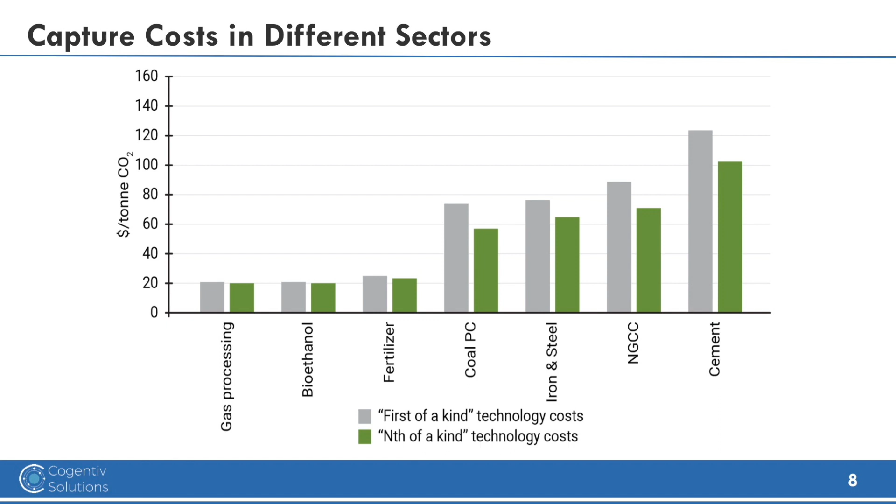The other interesting piece of this is that these are all based on modeling studies, and I'm a former modeler and have a great appreciation for that. But what we've seen on the ground is that the differences are actually substantially larger than that for going from first-of-a-kind to nth-of-a-kind.

So, what are the technologies that are out there being used? And you did a great job of starting us down this road, and so I'll just kind of run through it quickly, and in the context of different concentration sources. But there are solvent technologies, sorbent technologies, and membrane technologies that are out there being used at scale right now.

For both the solvent and sorbent technologies, they kind of operate on similar principles. It's just that the solvents use a liquid to grab the CO2. The sorbents use a solid to grab the CO2. So the CO2 ends up being associated with solid particulates for the most part.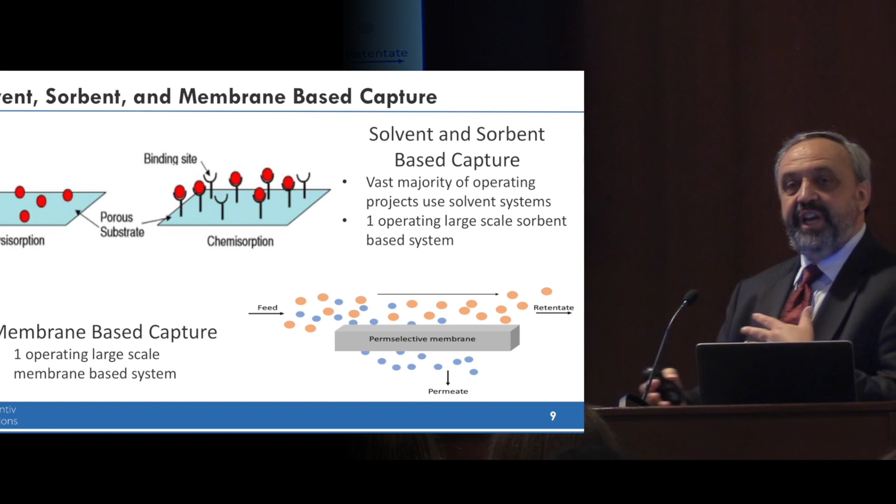There are a couple of different mechanisms that are important in removing the CO2 from a gas stream. And so there's physical mechanisms, so physisorption, and that's just kind of a weak association between the CO2 and the capture medium, the sorbent or the solvent. And those kinds of approaches are really good for high concentration gas streams. But if you have the lower concentration gas streams, like we see in power production, in cement and steel, you need something that is actually going to go out there and really grab that CO2.

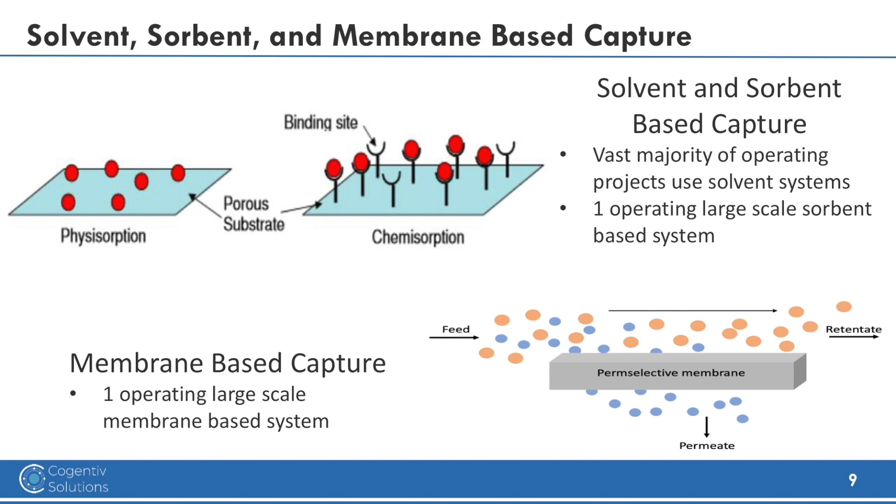And that's a chemisorption approach. And so it actually forms chemical bonds between the CO2 and the solvent or sorbent mixture that you're using. And so one of the challenges there is that when you've made those chemical bonds, you have to work harder to break those chemical bonds. And so it requires even more energy.

The other approach that is being pursued is membrane-based capture. Membranes operate by exposing your feed gas to a membrane surface, and that surface is specially designed to allow one component to move through fairly quickly while the other one does not, and so you get gas separation based on that.

Again, as Neva mentioned, the vast majority of the facilities that are out there operating right now use solvent-based systems. There's one large-scale facility operating down in Port Arthur, Texas, that uses a sorbent-based system. It's a hydrogen production facility. And then there's also one membrane-based capture system that's being used in natural gas separation at Lula in Brazil.

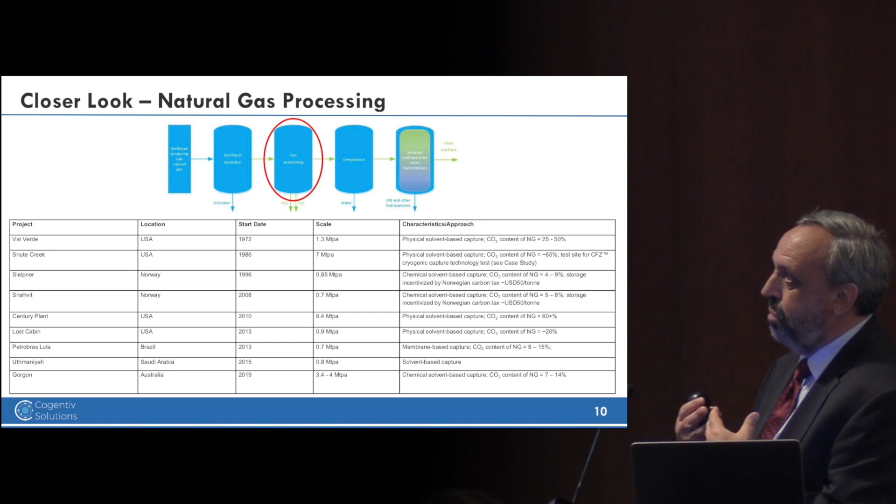Okay. So these next few slides, I kind of want to go through and look at some of these specific industrial applications to kind of reinforce what I've been talking about in terms of the cost and the ease of capture in these different systems. And it helps explain why these systems offer a real opportunity moving forward for carbon capture, and why they've been the ones that have dominated the facilities that have been produced so far.

So, one of the sectors that we talk about is natural gas processing. Whenever you extract natural gas from the ground, it doesn't just come up as a pure system. It always has other stuff in it. Some of the other stuff often includes CO2. And so if you want to sell that natural gas and put it into a pipeline, you have to remove that other stuff before you can do that.

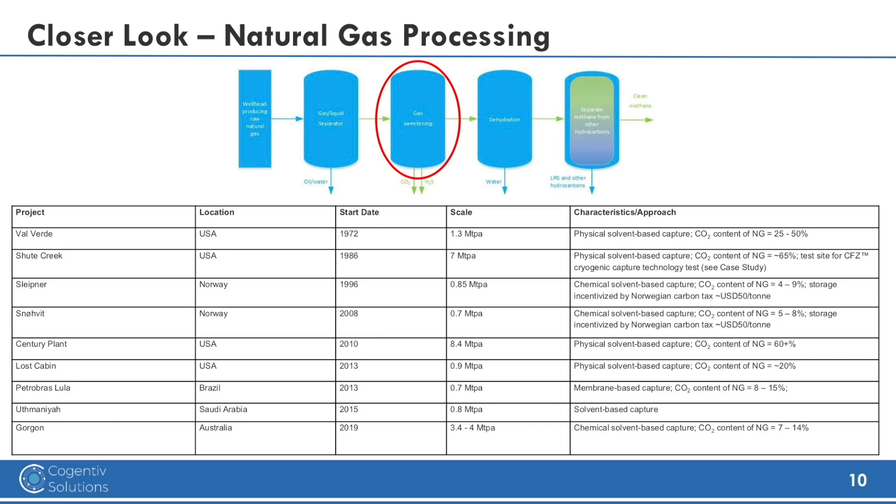And so it's just a natural, everyday part of doing business for them to remove the CO2 as part of the natural gas processing industry. And so you end up with a gas stream that's very high concentration, pretty high pressure too. And so it's inexpensive to go ahead and put that into a pipeline and send it for storage or use.

Fertilizer production is a similar type of thing. It's, again, just kind of a natural part of doing business in the fertilizer or ammonia production industry. And so, you start out with your fossil fuel, usually natural gas in this case. You reform that to form syngas, which is mostly carbon monoxide and hydrogen. You shift that syngas, so you convert most of that carbon monoxide into carbon dioxide and more hydrogen. And at that point, you can separate out the CO2.

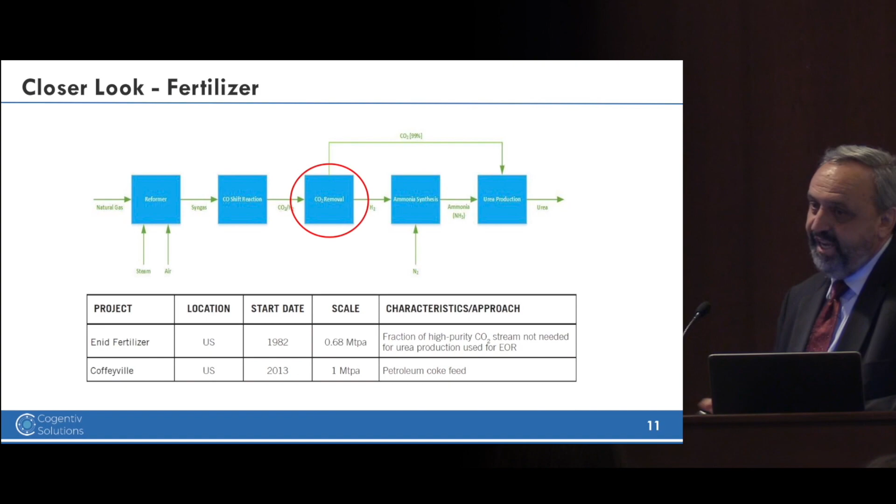They have to do that in ammonia production because this next step involves a catalyst that would be poisoned by the CO2. So again, they have to remove the CO2 in this process. Now, a lot of times what they'll do is they'll take that CO2 that they've taken out of it and pipe it over to another production unit to generate urea. But if there's excess CO2, then that can be compressed and then sold. And that's done at a couple of facilities in the Midwest, in Kansas and Oklahoma.

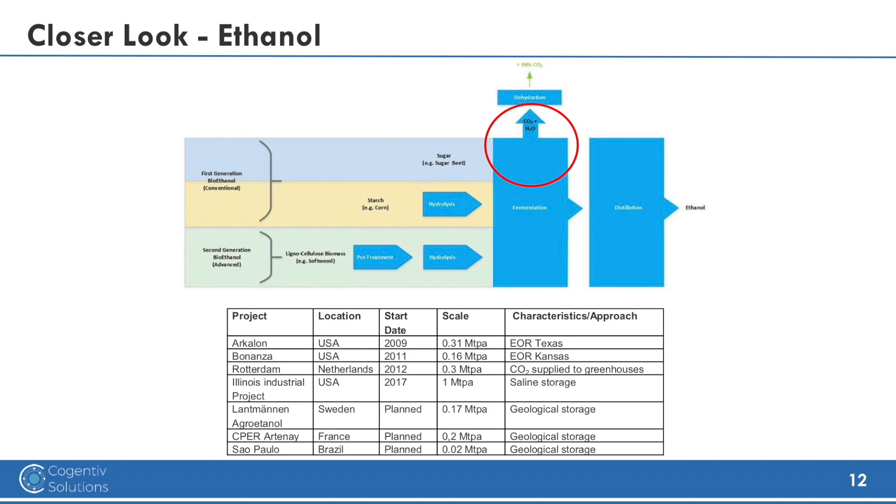Ethanol production is another interesting one. You'd start out with some kind of biomass, corn, sugar, or something like that. You grind it up, process it, get it into a form that you can deal with, and then you send it for fermentation. The fermentation process generates an almost pure stream of CO2 coming out of it. And so, it's about 99% pure.

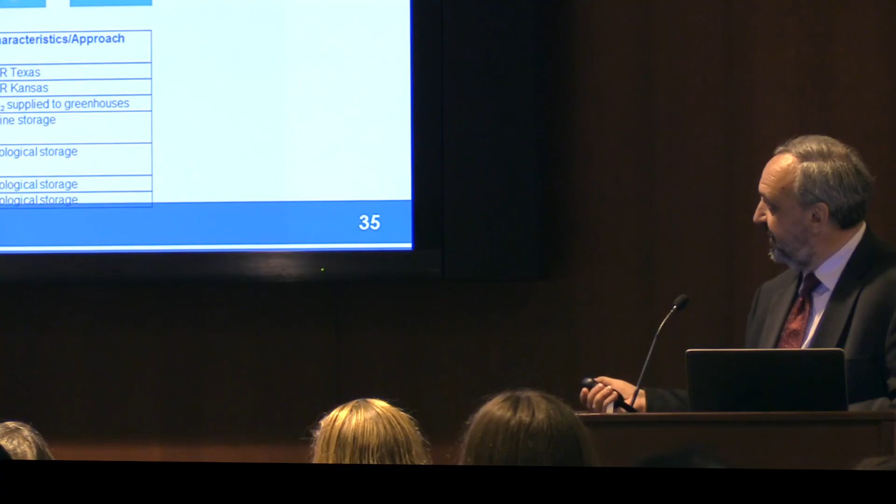The only thing you need to do with that in order to transport it or for use or for storage is to take the water out and compress it. And so, again, it's a very low-cost opportunity to separate CO2. And again, you see several facilities that are doing that. They're not all at the same scale as the processes that we're talking about. That's another common feature of industrial separation, is that they're often not at the same volumes that you'd see associated with power production, but you still need to get at it somehow.

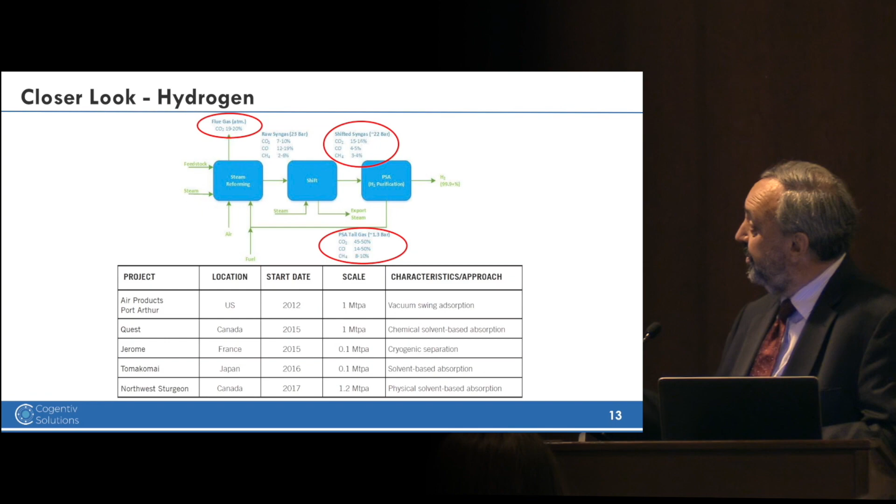Hydrogen's an interesting opportunity as well. Hydrogen is something that has received a lot of attention in Europe, a lot of attention in Asia as well. Production of hydrogen with CCS hasn't received as much attention here, but I think it deserves more. It's the same process you start with in ammonia. Typically you start with natural gas, reform that, form syngas, treat that syngas to generate more CO2, and then take that CO2 out of the system using techniques. It's at high concentration, so you can use techniques that don't require a lot of energy, and so it's a low-cost opportunity.

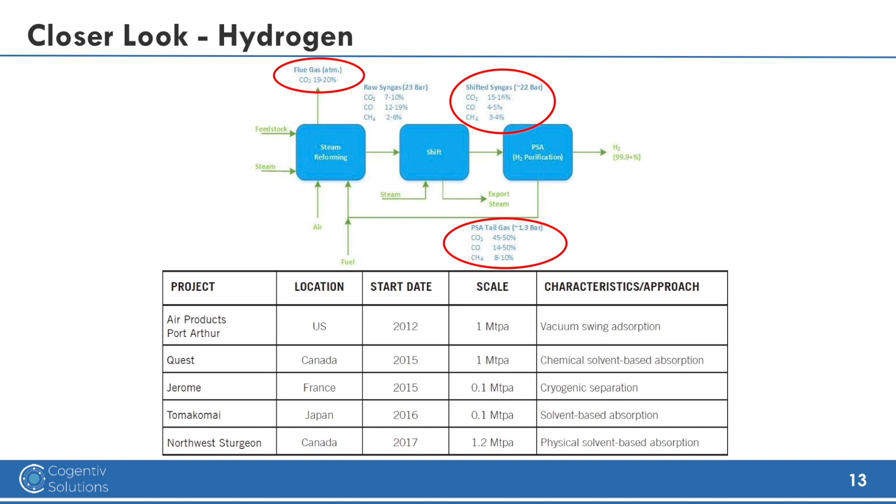There are other CO2 sources within a hydrogen production process and other places where you can remove the CO2. But this one, the syngas, offers the lowest cost opportunity, and it still gets you nearly 60% of the CO2 that's generated in a hydrogen production process. So if you were building a facility and wanted to remove a significant portion of the CO2 generated, that's where you'd start.

The last sector I want to look at in a closer way today is the cement sector. And Jason mentioned this earlier: there's no way to electrify your way out of CO2 production in the cement sector. That's because one of the key processes associated with cement production is where you take calcium carbonate, heat it up to drive off the CO2, and produce calcium oxide. That CO2 is going to be produced if you're going to make cement, so you absolutely have to do it. The only way to mitigate that is to capture that CO2.

Now, the way most cement plants operate now, all of the waste gases generated in the process are combined together and sent up through a stack at the end of the plant. At that point, the concentration of the mixed gas stream is 20 to 25%. There's a real opportunity though, with this process, to kind of separate out that calcium carbonate to calcium oxide production process and capture the CO2 that's generated there while it's at high concentration.

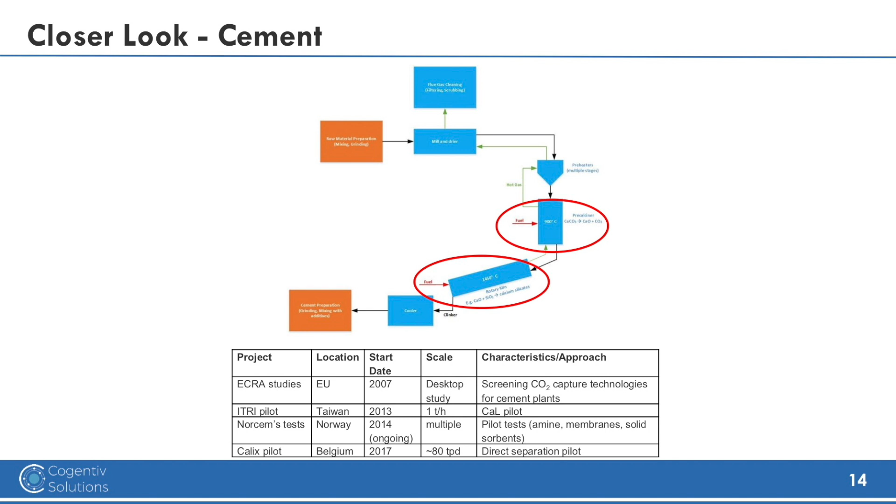And there's a pilot facility operating in Belgium right now where they're doing exactly that. So I think that, again, is a significant opportunity to reduce emissions from cement production. You won't catch all of the CO2 by doing that, but you get about 40 to 50% of the CO2 associated with cement production.

So just to summarize quickly, there are really significant opportunities in these different high concentration sectors to move CCS forward. They're relatively inexpensive, and incentives are in place just with 45Q that might help move operators toward pursuing CCS. I think they need a little bit more in terms of incentives, but in terms of the cost of capture, they're low enough that there's a real opportunity there.

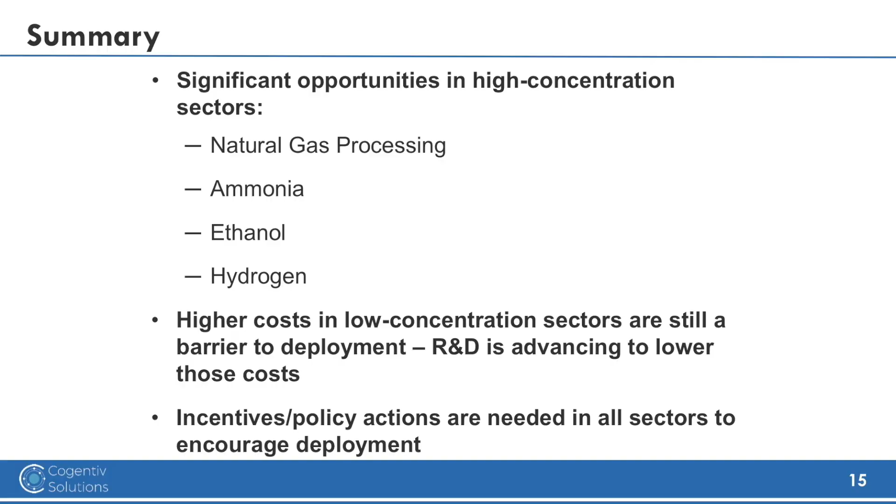The costs in the other sectors, the low concentration sectors like power, like steel production, are higher, and they're still a significant barrier to deployment. But there is research and development going on now to lower those costs. A lot of the research being done for the power sector could be transferable to these other sectors as well, which might help drive down those costs. And like I said, incentives and policy actions are a critical component of driving this whole thing forward, so that needs to be a major part of what we're talking about and what we do moving forward.

With that, I kind of ran through it quickly, but hopefully there's some explanation there, and if you have questions, I'm happy to answer those.